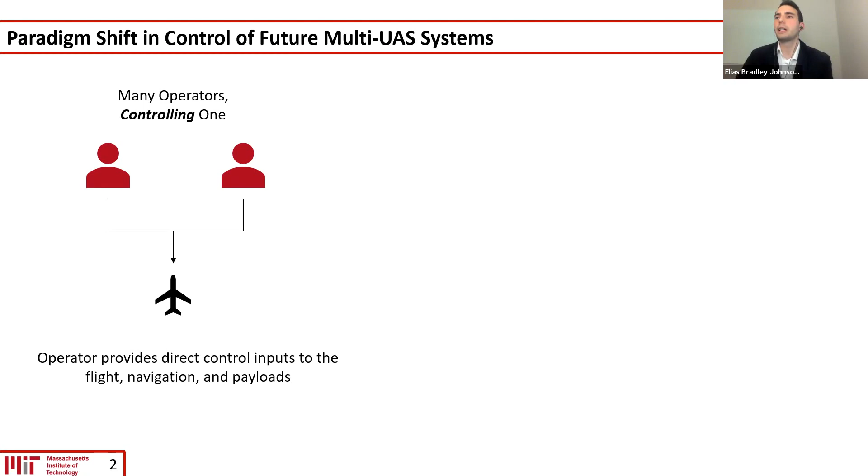systems. In the past, multiple operators were responsible for providing direct control over a single UAS. And the operators provided direct control inputs to the flight, navigation, and payloads of a single system. However, in future operations, it's expected that one operator will be responsible for supervising multiple UAS. And the big difference here is that there's an autonomous controller that assumes some of the low-level control responsibility previously

allocated to operators. In many of these applications, the autonomous controller helps develop plans for all of the UAS to work together to achieve the mission as a collective whole. And the operator provides inputs so the system can do this. And then it reviews all of the plans developed by the autonomous controller and can approve or deny these plans and ensure that the mission is completed effectively.

So this really is a big paradigm shift, both in the control complexity and in the operational complexity of these systems. And so future multi-UAS systems require a rigorous early safety design process to inform the design requirements. And the objective of this research was to perform a hazard analysis and provide early design recommendations for these systems, and at a larger view, demonstrate a process by which further design recommendations could be generated.

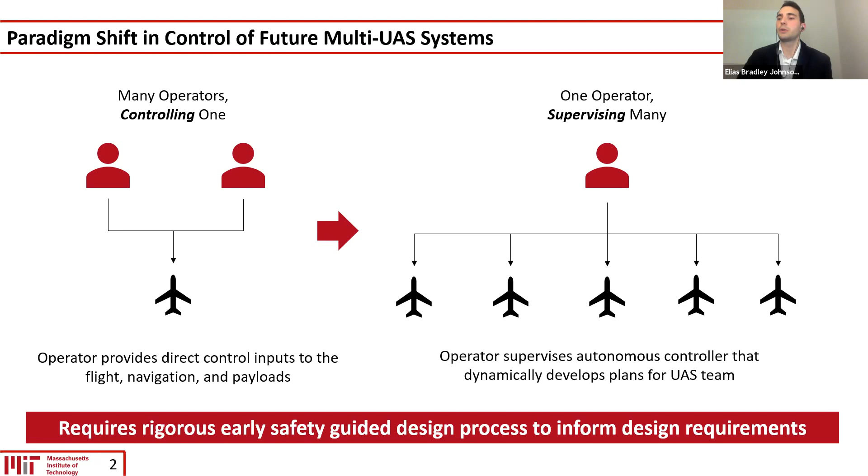Before I get into the results of the hazard analysis, I just wanted to provide a justification of why STPA was chosen for this hazard analysis. And the challenge is that traditional hazard analysis techniques focus on component failures. But the problem is that this omits accidents caused by non-component failures and unsafe interactions that occur among system components.

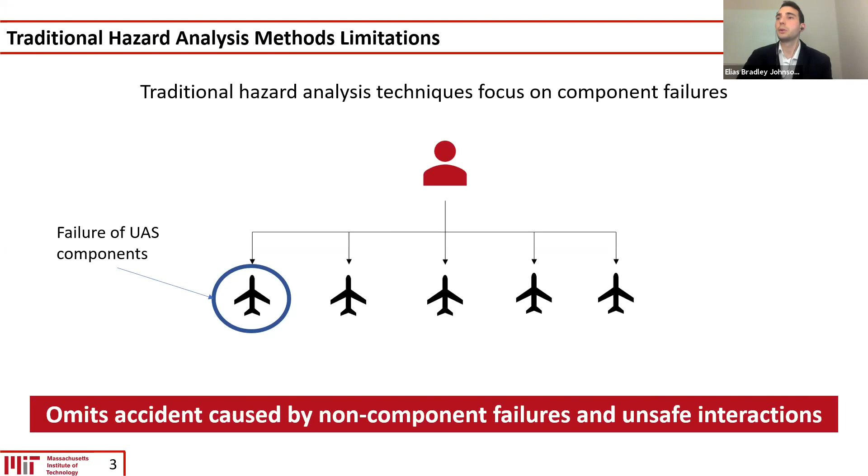And future multi-UAS systems will have complex interactions between operators and autonomous controllers that may not be adequately captured by traditional hazard analysis techniques. And so a different approach is required. And for this research, that was systems theoretic process analysis. And systems theoretic process analysis takes a different view of safety, and it treats safety as a dynamic control problem instead of a failure prevention problem.

And in STPA, accidents occur because of unsafe interactions that are not properly enforced in the system. And the system is modeled as a feedback control loop shown on the left, and hazard analysis is performed on the interactions between the components. And this can be used to understand interactions between humans and automation, humans and humans, and others as well. And so there are 4 steps to STPA that I'm going to walk through in this presentation.

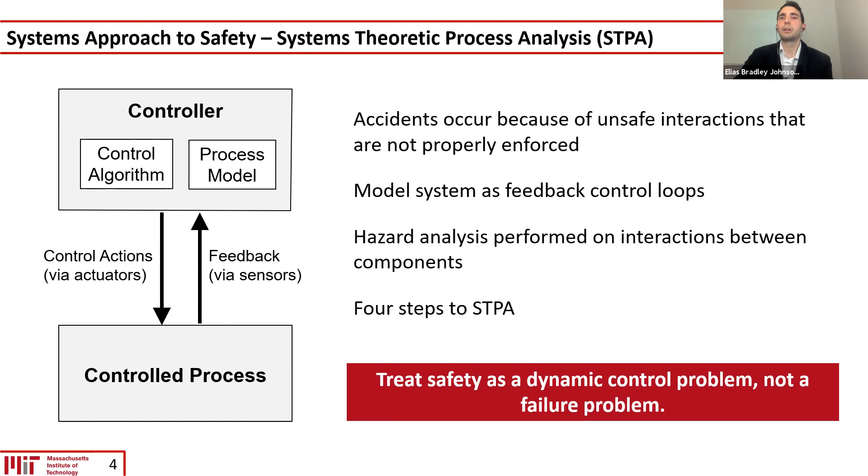The first step of STPA is to define the purpose of the analysis. And for STPA, that's losses. And losses are just unacceptable things that cannot happen during the design and operations of the system. These losses for this analysis included loss of mission, loss of life or permanent disabling injury, and loss or damage

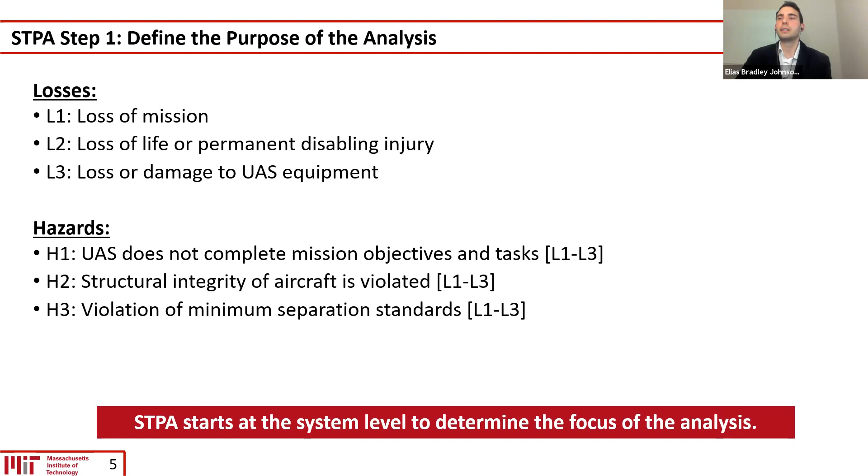to the UAS equipment. From there, hazards are developed, and hazards are ways that the losses could occur in a worst-case environment. And they are documented here. And the rest of the analysis is focused on understanding how these hazards could occur during the design and the operations of the system. So the next step is to develop the control structure of the system that's going to be analyzed. And abstraction can be used in STPA to manage these future multi-UAS systems.

And for this, you can see at the top, there's an operator in command who provides a mission intent. And this mission intent could consider a number of different parameters. For a UAS system, this could be no-fly zones. This could be a list of targets or a list of tasks that need to be accomplished. But here it's kept at a very abstract level so that the analysis is applicable to a wide range

of multi-UAS applications. So once the operator provides the mission intent, the multi-UAS fleet controller develops the plans for the UAS team, and it provides the feedback on the proposed courses of action to the operator in command, and the operator can either approve or deny these courses of action. And these are the control actions that the operator provides to the multi-UAS fleet controller.

Once the multi-UAS fleet controller receives the approved commands, they send out the mission tasks to the UAS to accomplish the mission. The important notice here is that this isn't a task that just happens once. This is something that happens potentially multiple times throughout the mission.

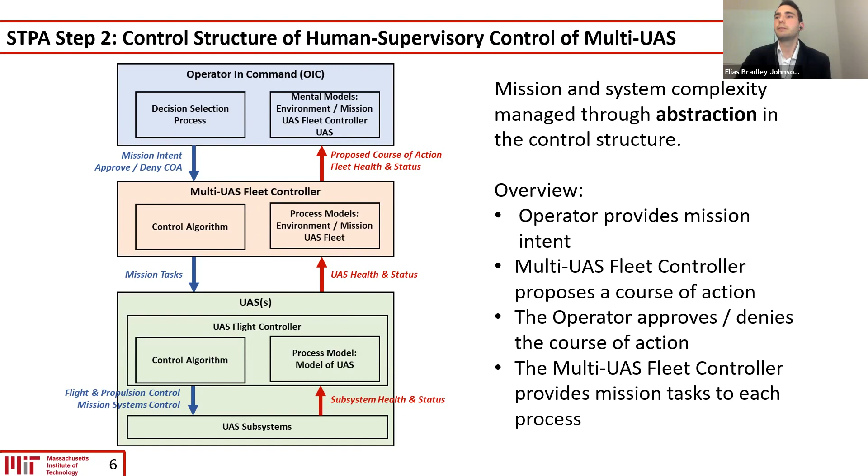The next step of STPA is to understand how the interactions among the components that have been developed in this model could lead to the hazards and ultimately the losses. And that is done by the identification of unsafe control actions.

An unsafe control action is a control action that in a particular context or worst case environment will lead to a hazard. And there are 4 ways that a control action could lead to a hazard. Not providing the control action leads to a hazard. Providing the control action leads to a hazard. Providing a potentially safe control action but too late, too early, or in the wrong order leads to a hazard. Or providing a control action that lasts too long or is stopped too soon leads to a hazard.

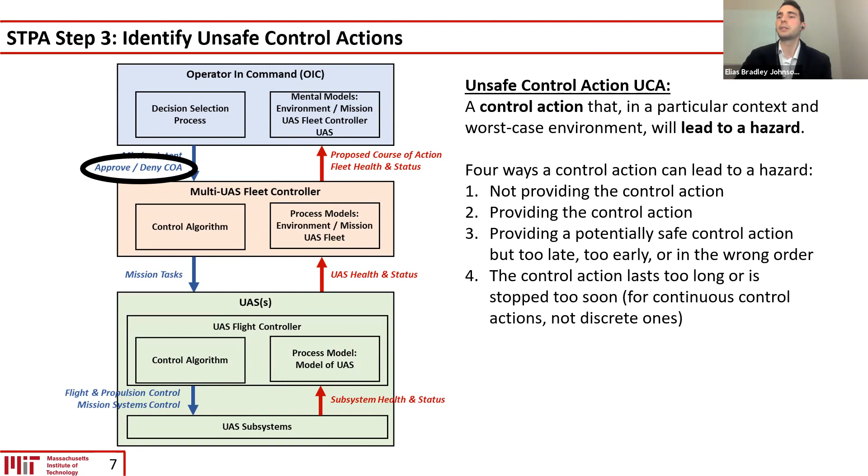What we're going to do for this presentation is just look at one control action and one way that a control action could lead to a hazard that was generated in the entire analysis as a demonstration. So we're going to look at how the operator approving or denying a course of action could lead to a hazardous system state. One of the ways that this could occur is by providing a potentially safe control action, but too late. The specific context, shown by the UCA below, is that the operator provides an approved course of action too late when there is a time critical or time sensitive task that must be approved and executed.

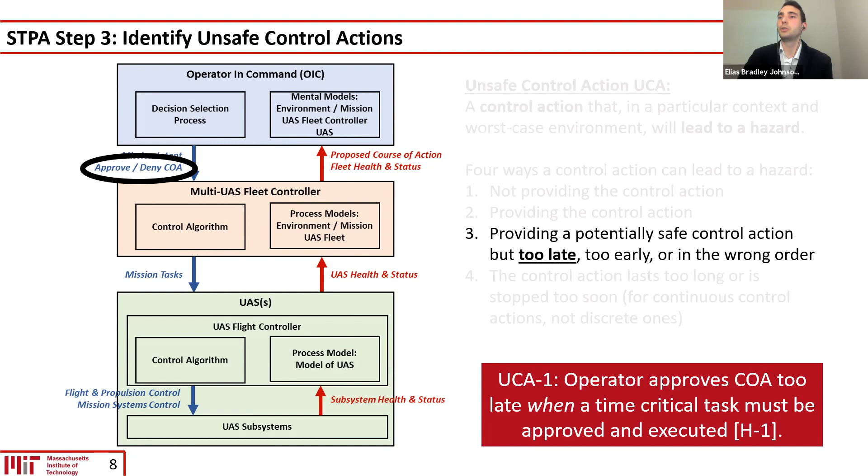So now that we've determined the unsafe control action, the next step of STPA that was done for this analysis was to determine why the operator might provide an approved course of action too late. That is done through STPA in the generation of causal loss scenarios. The causal loss scenarios describe the factors that lead to the unsafe control action and hazardous system state. So we're going to go through one example that was generated in the analysis here.

For instance, let's say that the mission that the UAS is accomplishing is a reconnaissance mission. The operator has provided some previous mission intent on potential targets to investigate. The multi-UAS fleet controller determines that they need to interrogate a stationary target, and so it develops plans for this for the team of UAS. Those plans are sent to the operator in command.

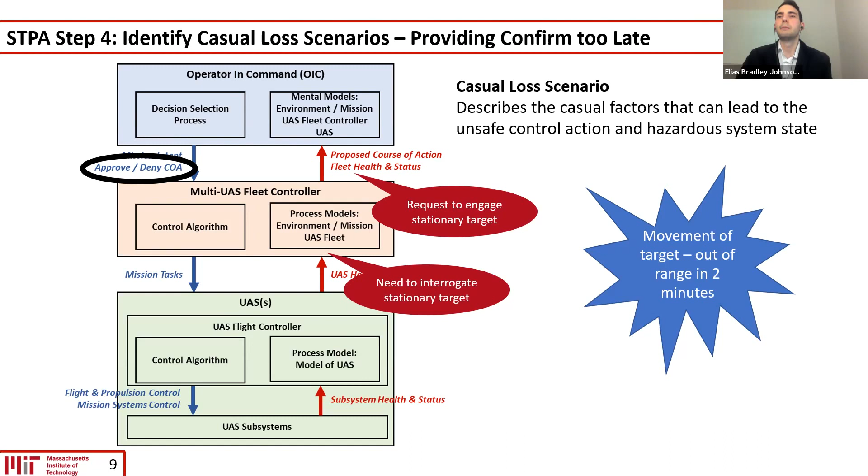But there's a movement of the target. The stationary target is no longer stationary, and it's going to be out of range in 2 minutes. But this was not communicated to the operator, so they believe that the task is not time critical. So they attend a time critical task first, and they eventually approve it. But by the time that it's approved, the task is executed too late, and it's no longer achievable because the target is out of range.

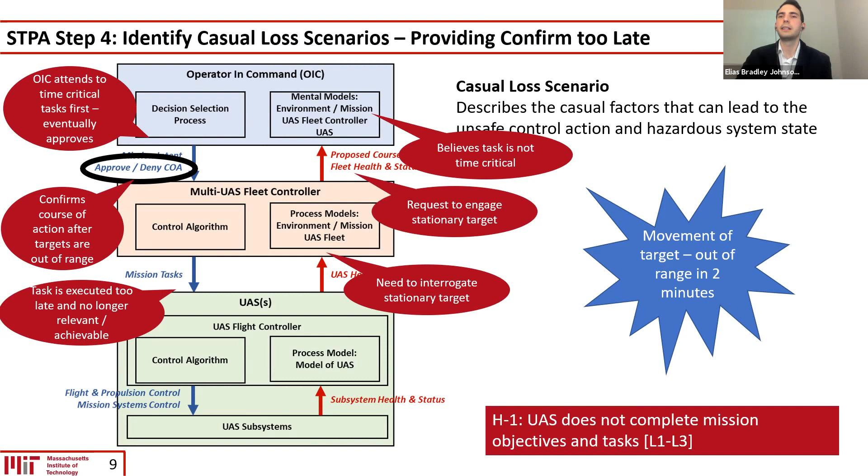So this is just one example of how we can develop a causal loss scenario that's caused by a breakdown in the feedback control structure. This leads straight to the hazard where the UAS does not complete the mission objectives and tasks. And this can be formally documented with traceability that was performed throughout the analysis. From here, we have: the operator in command may provide a confirmed action too late because a task that was not originally time sensitive when requested by the UAS fleet controller becomes time sensitive because of changes in the environment. We looked at movement of the target, and there was no feedback to alert the operator in command.

So from this causal loss scenario, we can systematically generate safety-driven design requirements for future multi-UAS systems. One of these requirements that was generated in the analysis is there must be a feedback mechanism to alert the operator when a non-time sensitive task becomes time sensitive. These requirements and the causal loss scenarios also lead to additional questions that may need to be addressed with additional human factors research or additional hazard analysis. So it can become an iterative process where we make recommendations for the system and trade studies are performed for the additional recommendations that are created.

One question that might need a trade study is, how should the operator be alerted when a task becomes time critical? Another one is, how should the feedback for non-time critical tasks differ from time critical tasks? Another potential design requirement is that the multi-UAS fleet controller must have a means to update or delete requests if it determines the action is no longer consistent with the mission objectives. From here, we can see that there is direct traceability from the design recommendations back to the causal loss scenarios.

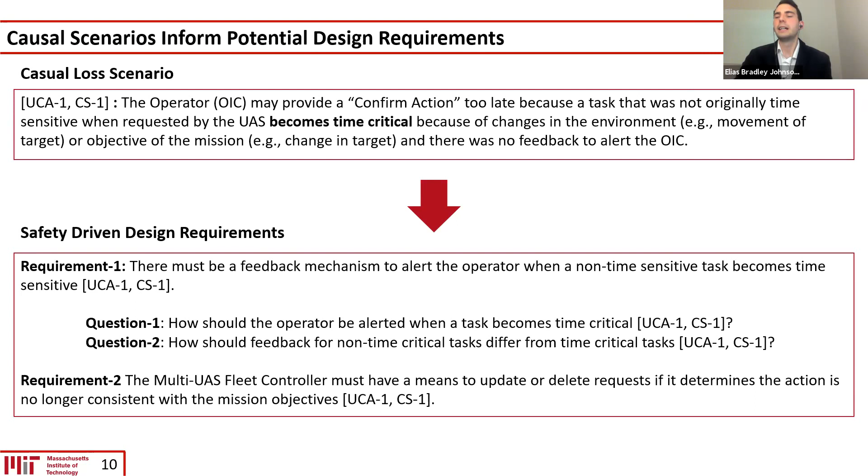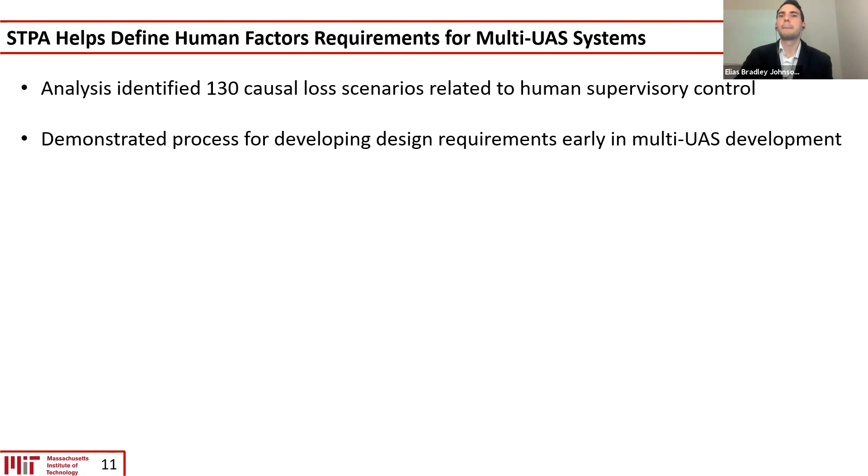This was just one example that was provided in the full analysis. In the complete analysis, there were 130 causal loss scenarios related to human supervisory control. Overall, it demonstrated a process for developing design requirements early in multi-UAS systems. And that is everything for this overview.